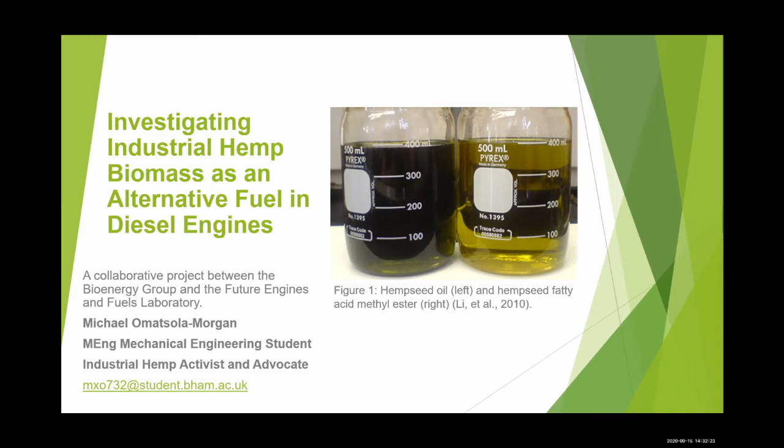So today I'll be going over the following. I'll first provide some background and context as to why this research is so important. I'll then talk about some literature review, talking about the current conventional method of making biodiesel and this new cutting edge technology that I'll be proposing to use. I'll then talk about my project aims and briefly give an overview of what I'll be doing throughout the research.

I'll then talk about the history of hemp or cannabis. I'll then talk about government regulations that surround the cultivation of cannabis, and then some current legal cases that are forming against government policy. And then finally, I'll link it back to a local case study, local to Birmingham, as to why this research will be beneficial. And then I'll provide some concluding remarks, and the remaining time will be left for questions at the end.

So the climate crisis continues to impose a significant threat on key natural and human systems. Wildfires across the globe are occurring more frequently and with increasing catastrophic impact. The scientific consensus is that most of the observed warming over the last 50 years is likely to have been influenced by human activity. So it's no coincidence that there's a positive correlation between human population and global carbon emissions as well.

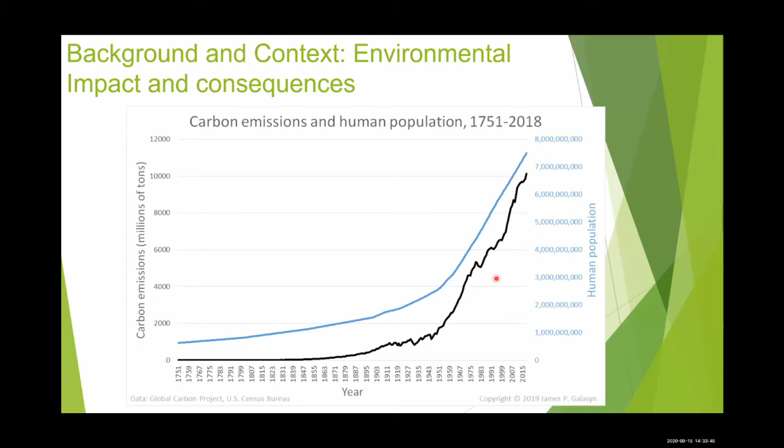Now, if humans continue to disregard calls to protect, preserve, and replenish our environment, the global population will face radical consequences. So in 2019, the UK government announced its plans to bring greenhouse gas emissions to net zero by 2050. A Full Fact article has analysed the claims made by the government, and they came to the conclusion that a few other countries have set similar or more ambitious targets.

Furthermore, they've concluded that while the UK has exceeded in cutting its own emission targets and have made bigger cuts compared to other G7 countries, this isn't enough to meet the future reduction targets. This was analysed using the current environmental policies that have been made. So it's really important that the UK implement more policies that ensure that this reduction target is met.

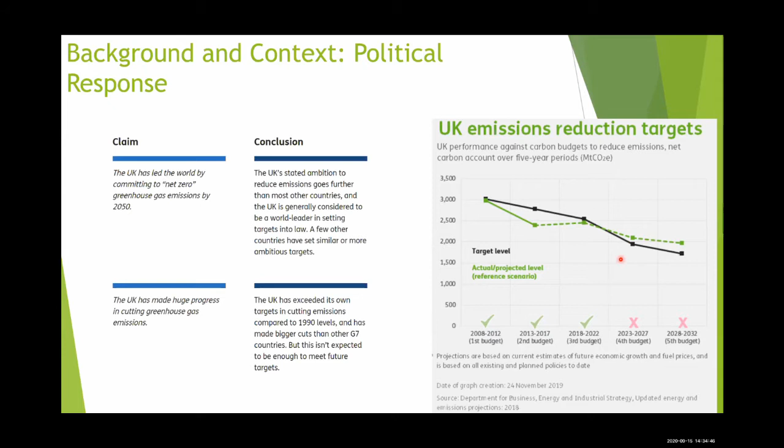And the Prime Minister has announced the creation of the Jet Zero Council, which is being tasked with making net zero emissions possible for future flights. And furthermore, they've pledged £350 million to fuel a green recovery and cut emissions in heavy emitting industries. So the transport sector accounted for 24% of emissions in 2019. Transport is currently the largest emitting sector of UK greenhouse gas emissions. And looking more specifically, road transport consumed more than 50% of the oil demand in 2019.

Now, the UK plan to rely on these diesel imports for the foreseeable future, but they have an interest in diversifying their road transport methods to electric and ultra-low emissions vehicles, or ULEVs. ULEVs are vehicles that emit less than 75 grams per kilometre of carbon dioxide from the tailpipe. In 2019, they accounted for 2.7% of all new registrations, with hybrids being 53% of these registrations. But there's global potential for ULEVs. It's estimated that by 2030, there will be a global market worth £2 trillion.

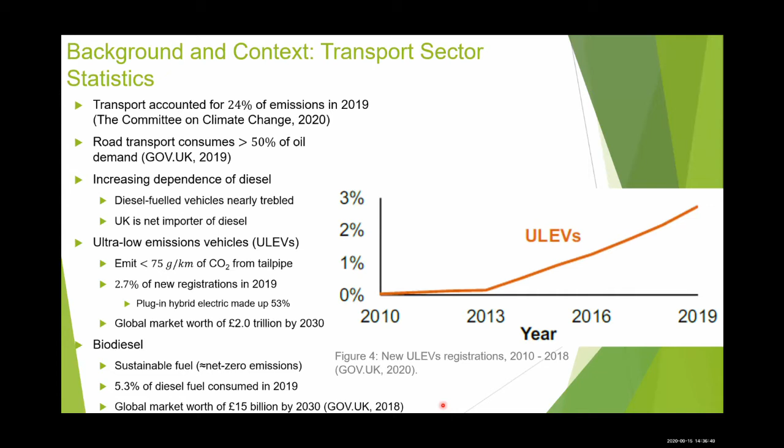Well, it depends on three things. It depends on the feedstock that you're using, depends on the conversion process, and it also depends on the fuel quality. So starting with the feedstock, I'll be blunt. Hemp is cannabis with a low THC content, so it's non-psychoactive. But industrial hemp has some fascinating qualities that make it an ideal candidate to be a domestic renewable energy source.

So it's a fast-growing biomass and produces high biomass yields. It's also a very eco-friendly crop as well, so it's an excellent carbon sink. It can sequester more carbon dioxide per hectare than what woodlands can sequester in the same year. It can also readily remove heavy metals from contaminated soil through phytoremediation. And because it has a long root system, this can cover more volume of soil, therefore being more suited to

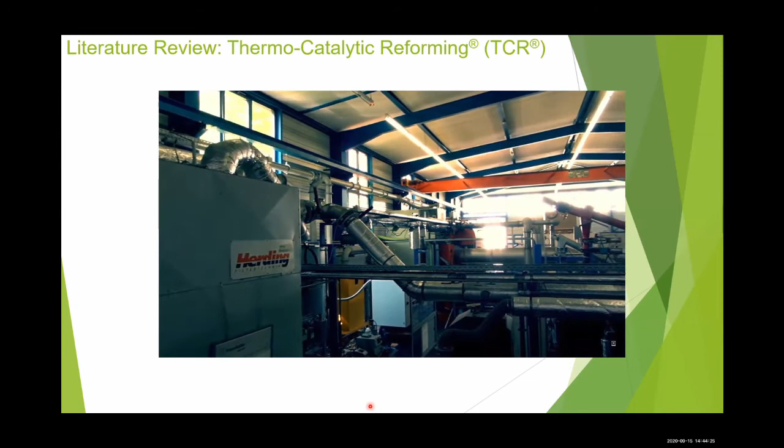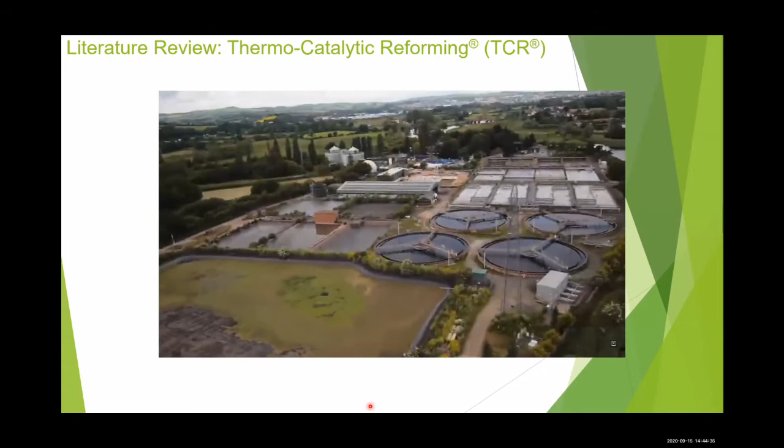Renewable energy technologies are becoming increasingly important in these times of climate change, and the Fraunhofer Institute has developed a new process based on the efficient use of biogenic residues. TCR, or thermo-catalytic reforming, benefits from high feedstock flexibility and can take a range of problematic organic wastes, including animal manure, agricultural residues, straw and husk, food waste, organic waste, sewage sludge, municipal solid waste, and biogas digestate.

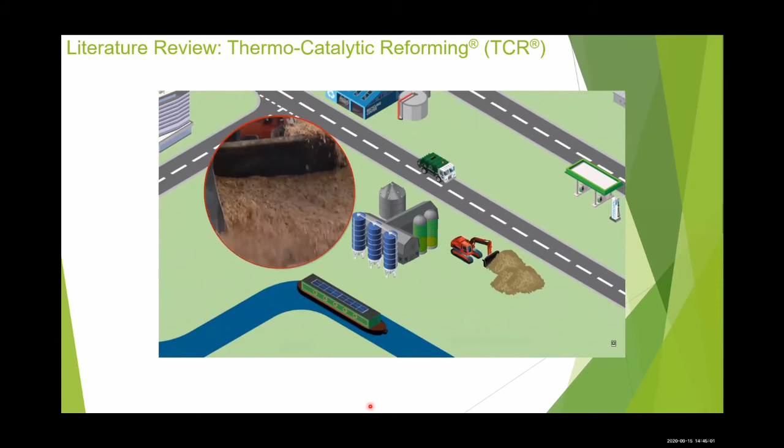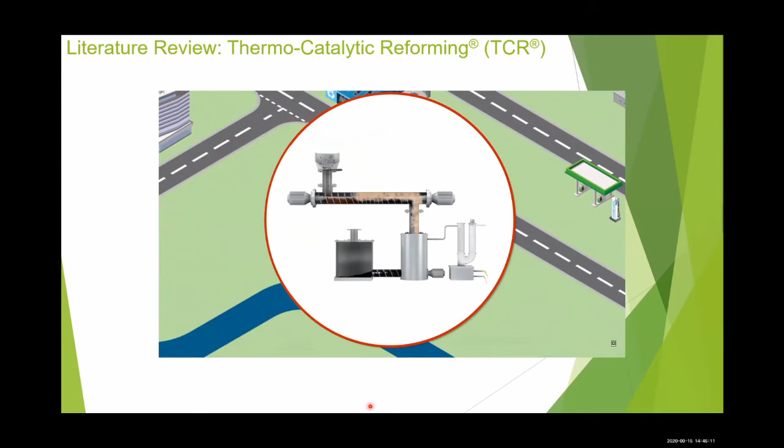The TCR technology site is at Tyseley in Birmingham. Various biomasses and biomass residues can be transported into the site by lorry or barge. They are unloaded and used as feedstock for the TCR technology. The TCR converts the biomass residues into gas phase, liquid phase and char, all of which are of unique quality. The char can be used for co-firing in power plants and also in agriculture as fertilizer.

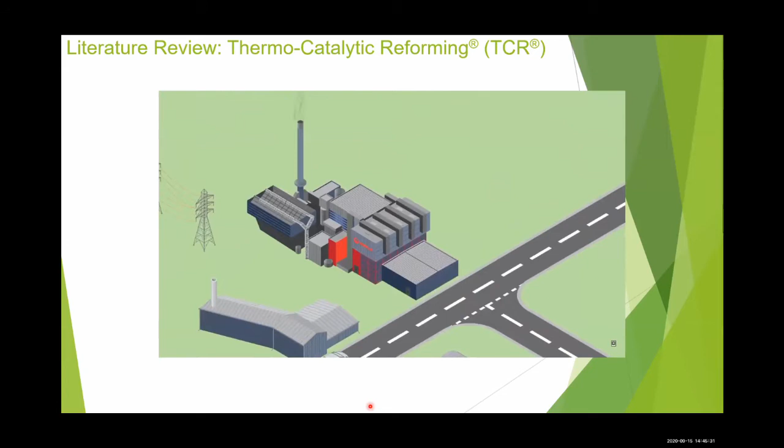After refinery, the fuel we produce can be used in cars, both petrol and diesel engines, and even as jet fuel for the aviation industry. Finally, in the gas phase, the hydrogen can be used to create electricity in combined heat and power plants, as well as being used in hydrogen fuel cells and as fuel for cars and trains.

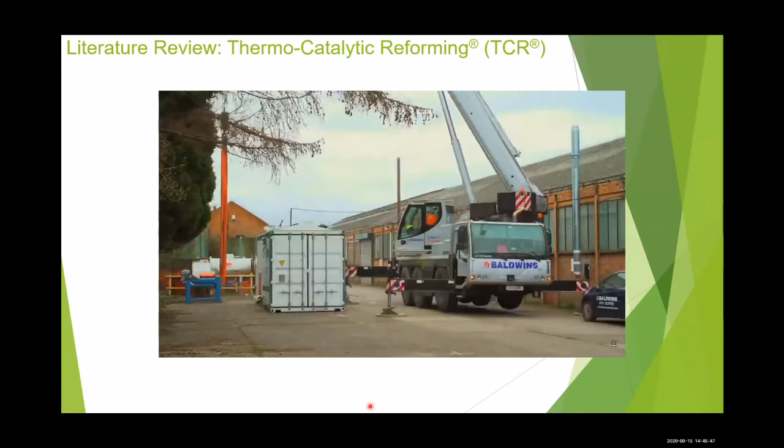Today is a significant day as it marks the delivery of our first demonstrator to the City of Birmingham at Tyseley Energy Park. The Energy Park will combine all types of new and existing renewable energy technology to produce green fuels for the City of Birmingham. The Energy Park is one of a number of energy innovation zones within the Energy Capital, a new vision that aims at making the West Midlands one of the world's leading destinations for energy innovation and investment.

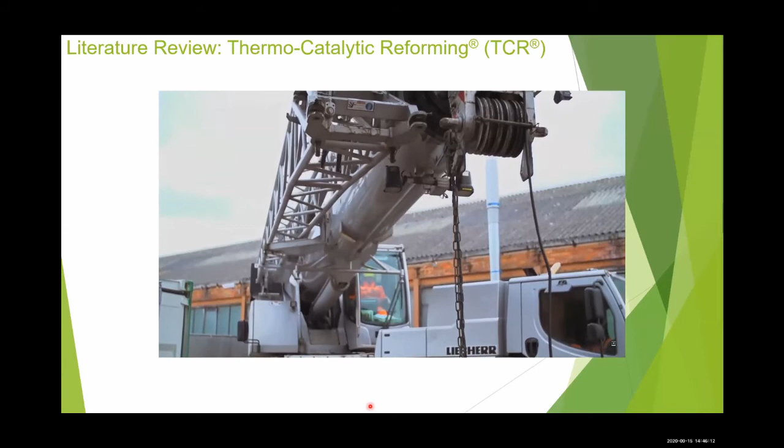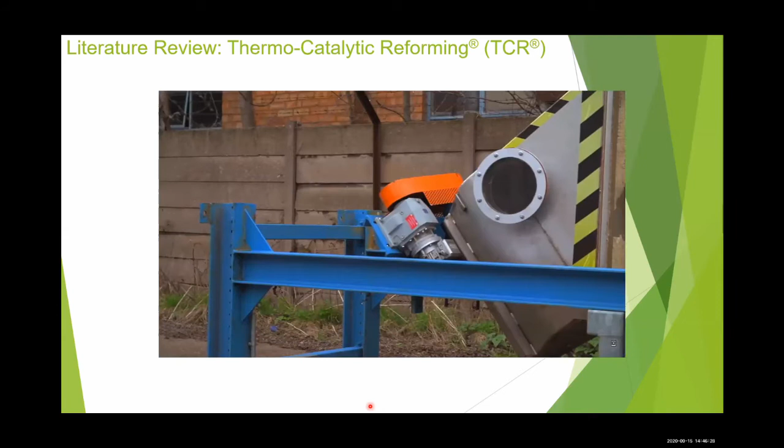Phase 1 of the Energy Park has seen the delivery of a 10 megawatt wood gasifier, and this reactor will be linked to the second phase of development on the low carbon refueling station. Our thermo-catalytic reforming technology is not only part of the Energy Park, but is also part of the Birmingham Thermal Belt, which is a concept first coined by Professor Andreas Hornung in 2008 to realize 20 decentralized biomass conversion plants

around the cities. This particular reactor, which you can see behind me, will convert up to 80 kilograms an hour of biomass and plastic residues into bio-oil, hydrogen-rich synthesis gas and biochar for energy generation and value-added chemicals, and this is funded by a £60 million Innovate UK Energy Research Accelerator.

Being part of the Energy Research Accelerator and having located here at Tyseley Energy Park, we have now the right setup to deliver the thermal belt for Birmingham, including 15 to 20 units of TCR technology, taking residue material from all over the place and delivering green hydrogen, green fuel and green power to the city.

Okay, so thermo-catalytic reforming. This is a new cutting-edge technology of converting biomass and other waste products to sustainable fuels. So the process involves feeding the feedstock into the TCR reactor, and it's met with a screw reactor where it's then ground up and heated in the absence of oxygen. So this process is pyrolysis, and it creates the biochar, the hydrogen-rich synthesis gas, and this crude liquid bio-oil.

So these byproducts are then fed into a second chamber where it's then catalytically reformed to create a higher quality fuel. So the crude liquid bio-oil has similar properties to crude fossil oil. So you can kind of think of it as like a meat-free substitute of crude oil. And these aromatics can then be further treated to replace the sulfur, nitrogen, and oxygen atoms with hydrogen atoms, therefore increasing the energy content of the fuel. And then they can also be fractionated off into its biopetrol, biodiesel, and biokerosene fractions.

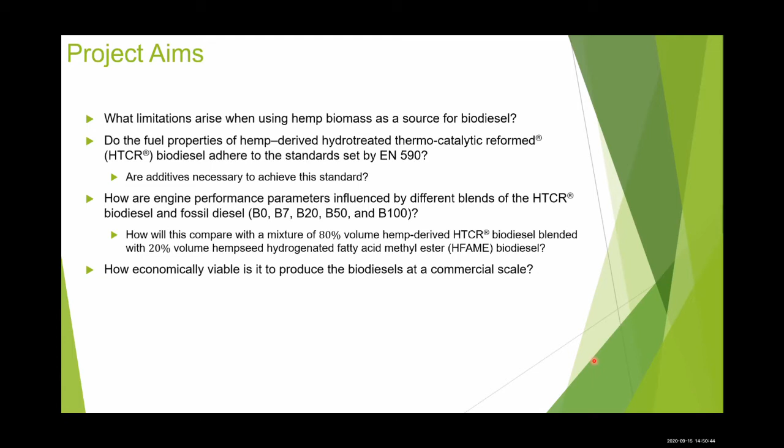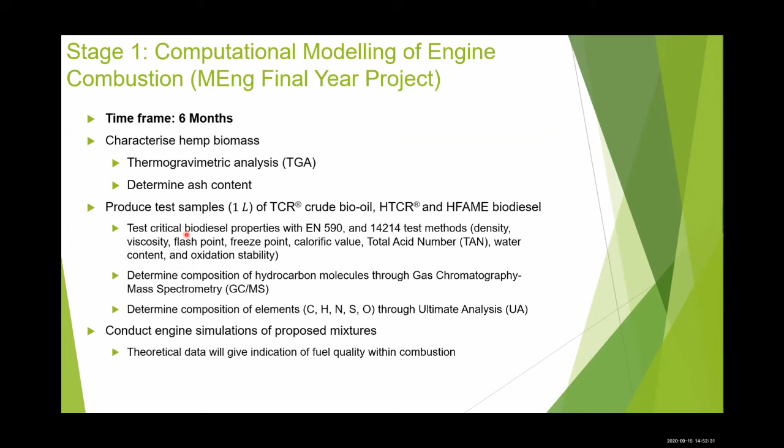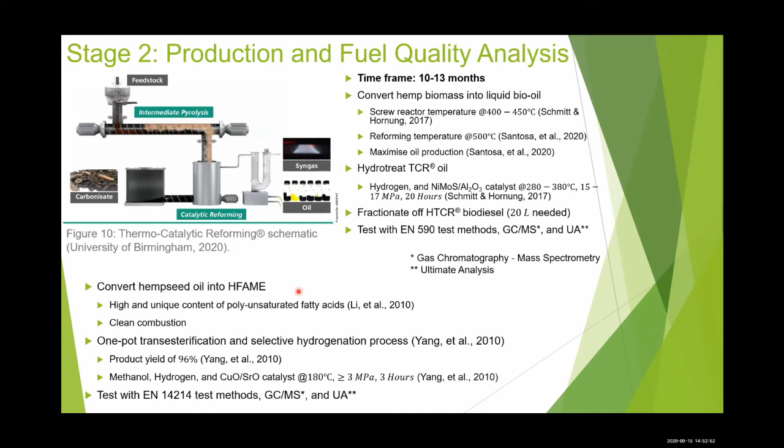I'll then do the same process with hemp seed oil into the hydrogenated fatty acid methyl ester. So hemp seed oil is a commercially available product, easy to get hold of. The process I'll be using is a one-pot transesterification and selective hydrogenation process. So it's doing both transesterification and selective hydrogenation in the same reaction. This is for both convenience and also the high product yield that this study produced. And then again, I'll be testing it in accordance with these analytics, the EN standard, gas chromatography, mass spectrometry, and ultimate analysis. So these last steps, the analytics, will then be used to determine the fuel quality of both biodiesels.

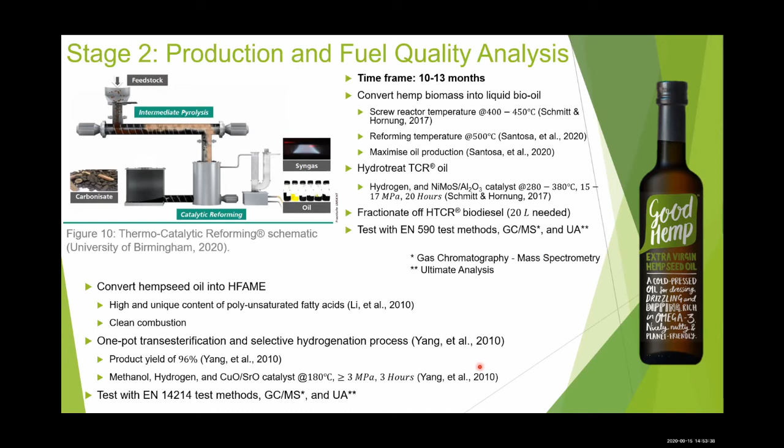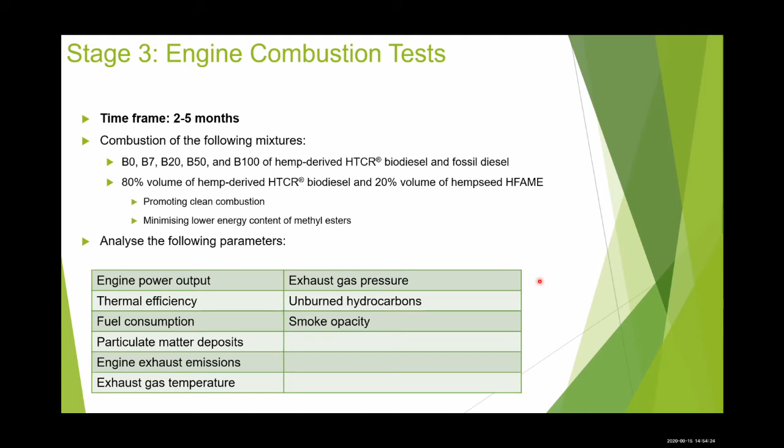If they show to be of high quality, then it can move to its third stage, which is the practical engine combustion tests. So like I said before, it'll be combustion of the following mixtures, going from pure fossil diesel to pure HTCR biodiesel, and then using 80% HTCR biodiesel and 20% hemp seed biodiesel. So this mixture I find quite significant because I've included 20% methyl ester because I want to promote cleaner combustion. However, I don't want to put too much methyl ester that it compromises in the lower energy content. And then finally, I'll be analyzing these engine parameters to measure the engine performance.

So during my research, I came to the realization that hemp would be a really sustainable replacement for a variety of different products. So my next question, and maybe you're wondering as well, is why is it not used everywhere? Well, cannabis has a long history within the UK. Dating back to 1533, King Henry VIII actually mandated that landowners grow a quarter acre of hemp for every 60 acres that they own.

Then later in 1579, Queen Elizabeth I increased these quotas to 1 acre and even went further to impose a fine of £5 for landowners who failed to comply with this quota. Then during the 16th to 18th century, the British Royal Navy grew to be one of the most powerful navies in the world. And this was because of their sailing navy. So the sailing navy used hemp sails and hemp ropes within the design.

But then in the mid to late 19th century, there was the decline of the sailing navy, and this was replaced with steam-propelled ships. And as a result, hemp cultivation decreased. Then in 1928, the Dangerous Drug Act included cannabis and its other raw forms to the act, and therefore cultivation became illegal. This isn't in the UK, but in 1941, Henry Ford produced a car door and fender prototype from hemp-based plastic. So he envisioned that the entire chassis of this car would be made from this hemp-based plastic, and the car would also run on hemp ethanol.

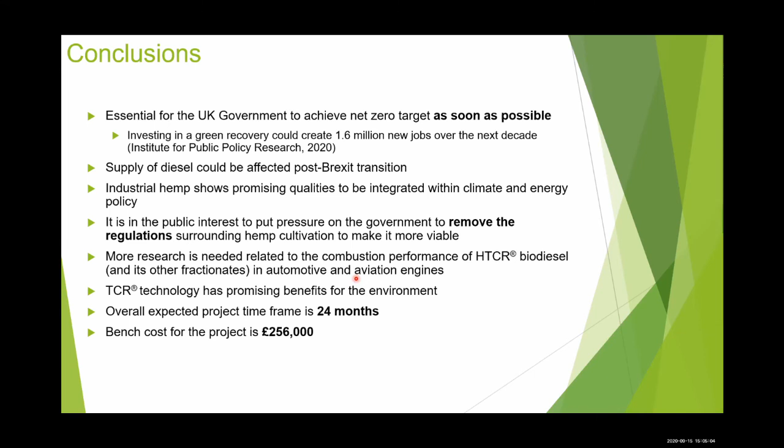So that's the end of my presentation. Thank you for listening. Are there any questions?

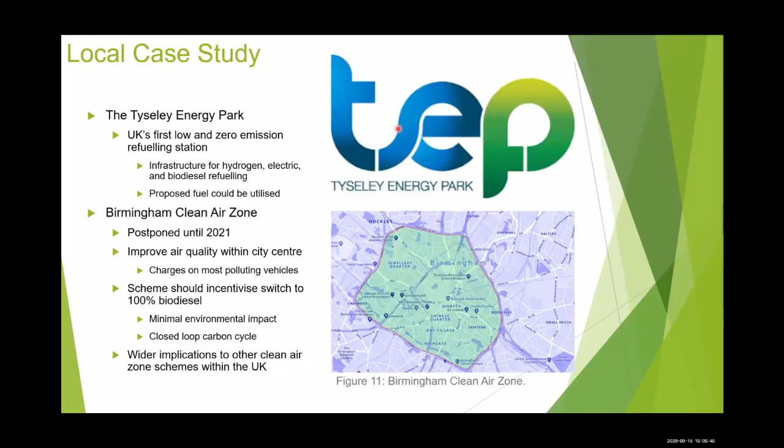Yeah, the first one. In your slide, I saw that you compare the FAME biodiesel and the TCR biodiesel. Have you measured the composition of these two types of biodiesel? Because we know that the fuel composition will finally determine the fuel properties. Therefore, I want to know something about that.

Thank you. With the methyl ester, there are studies out there that show the typical composition of what fatty acids are within hemp seed oil. There's also been a study that shows the composition of what hydrocarbons are within the TCR bio oil. The only problem with the bio oil one is that it's for the crude general bio oil. So I'm not sure which of those hydrocarbons are then refined to be biodiesel, which go to biopetrol, and which go to biokerosene.

But like I said, there are studies out there for the composition of hemp seed fatty acid methyl ester. I'll include this more in my report, but for the presentation, I didn't want to go too deep into what the compositions were. Yeah, thank you, Michael.

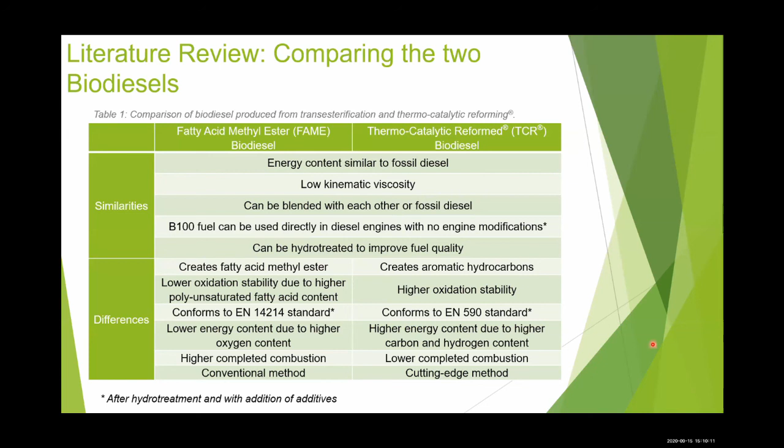Thank you. So there's different methods of converting biomass into sustainable fuels. There's gasification, there's pyrolysis, and you can also do fermentation. This TCR technology, from what I've gathered from the research that I've looked at, is something particularly innovative, more in the sense that it just combines these two different processes together to form one process. So it still uses the fundamental knowledge of these previous conversion processes, but it combines them into one system.

Thank you, Michael. And one more question. Do you know what exactly is happening in the reactor conducting the catalytic reforming? Have you investigated what's happening inside, any pathway? So I was actually worried if someone would ask this question.

From the papers that I've read so far, they say that they do the intermediate pyrolysis, which degrades the biomass by heating it in the absence of oxygen. And then the next sentence is, it's then catalytically reformed to improve the fuel quality. So chemically, I'm still unsure as to how it actually converts it into a higher quality fuel. But when I start my project in more detail, I'll have more conversations with professors and postgraduates on what's involved chemically with this catalytic process.